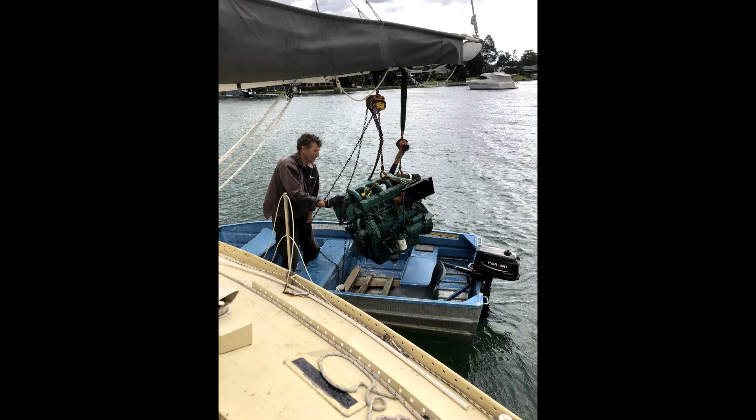Welcome to another video. I didn't get as much achieved this week as I wanted to, but it was still fairly interesting. I got the jackhammer in the bottom of the boat and cleaned a fair bit of it out. It showed me a lot more going on down there in the hull than I realized. I'll explain that with a sketch at the end of the video.

There's a lot of crap in there. I actually think their head might have exploded or something at one point because of the smells coming out of that rubbish in the bottom of the boat. Oh, they were toxic. I swear if it was early morning you'd be throwing up. Just rank.

As I say, it's only a short video. I'm not going to make you sit through 2 or 3 hours of me just sitting there with a jackhammer and a scraper pulling gunk out of the bottom of the boat. The end result was pretty good. I've moved a lot of the rusty material out of the bottom of the boat. There's still a fair bit to go, but I'll get there. Alright, I'll get on with it so you can see what I've discovered.

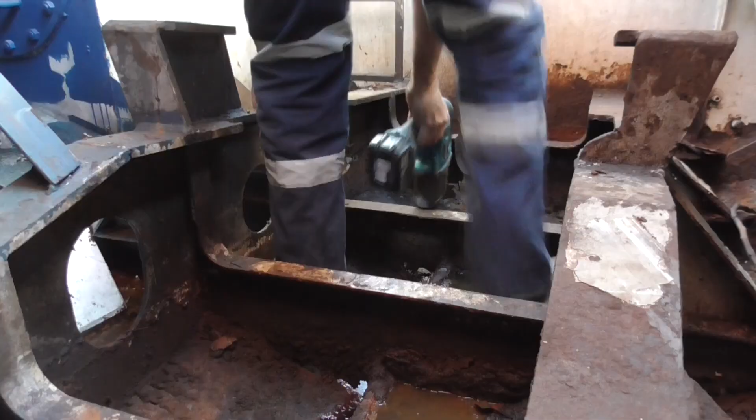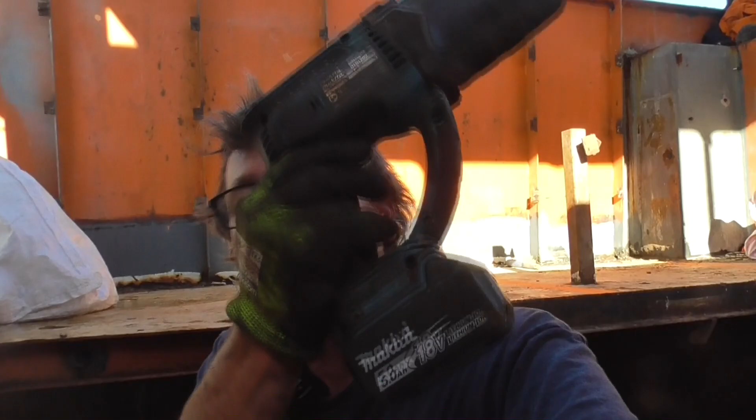Okay, I'll give you a bit of a look at exactly what I found here. I've just been chiselling away with this battery operated chisel. I'm going to get a 240 because I don't feel like recharging batteries all the time. So there we are, there's the first one I've chiselled out.

You can see there, a piece of plate, and then just below that there's another piece of plate. So what I thought last week was exactly what they've done. They've turned around and laminated that plate on the underside, straight underneath this one. There's another big hole just there.

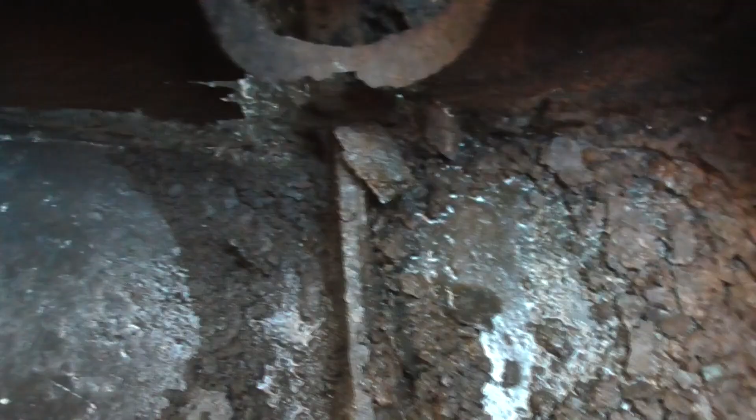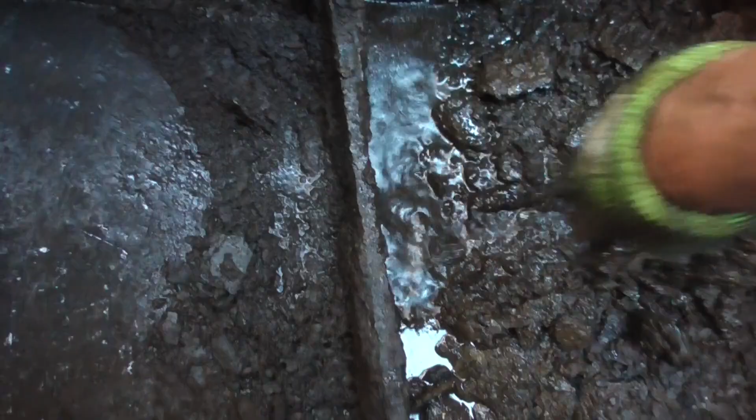You can see there when I was jackhammering, you can see a little bubble. That means there's water caught between the two plates. Look at all that quality steel. What the hell's that? Oh, just rust. I might have to get a little pointed chisel as well, just to run into those corners.

So what I'm going to do here now is pour a bit of water in there. I just want to see exactly what I'm looking at.

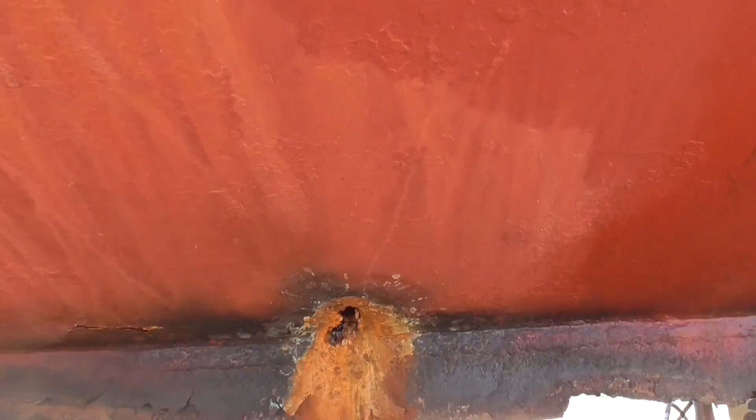It's been 3 days and our water's finally stopped running. Right, we can finally see the extent of this rust. You can see the heavy plate down the bottom there.

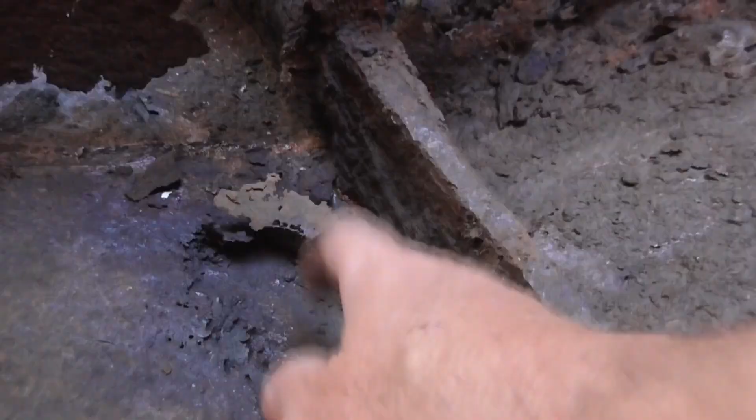And then this is the original hole, and in there is literally nothing left. That is eaten away.

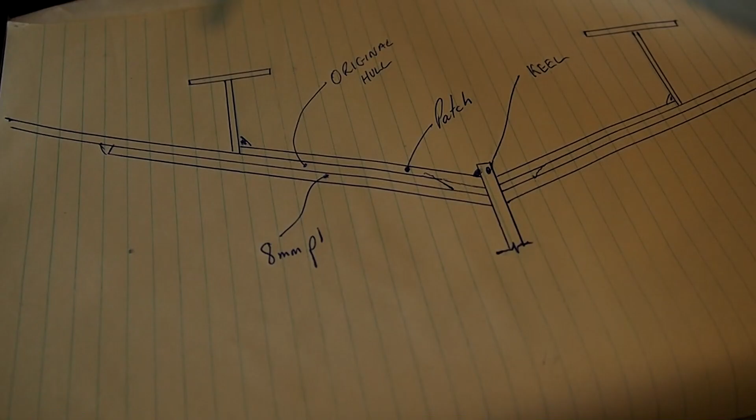Okay, so this is what I found. This piece of plate here is the original hull. Now at some point it got a bit rusty and started to pit holes through there.

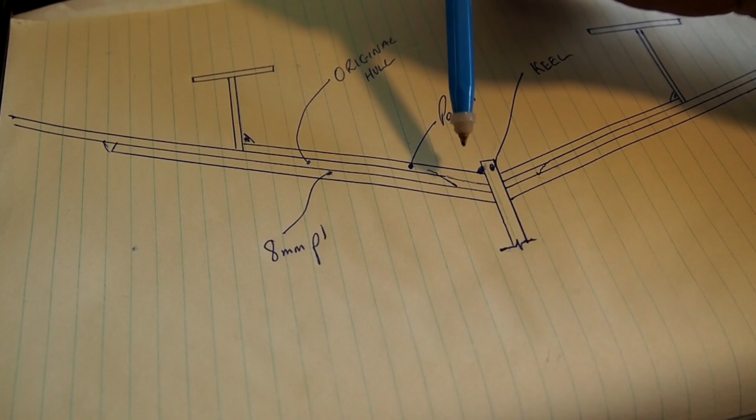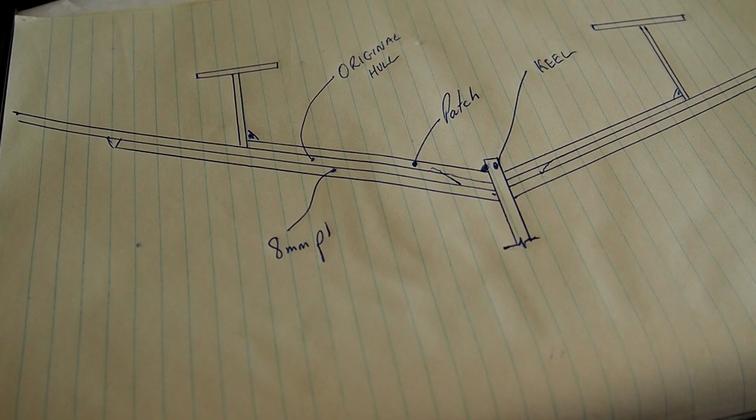Then what they've done is put a patch plate over the top to stop the boat from leaking. They only used a piece of 6mm plate on that, and then it's eaten through again, so they came back later and put this piece of 8mm plate over the outside, welded here and here. So yeah, it's got a lot of steel in there that's got to come out.

So my plan is to cut through here, take this out, cut it off here, and then plate inside with brand new plate from there to there. So you can see there were 3 layers of material. I'm taking out a fair chunk of the hull.

Having this happen isn't a bad thing, because it's going to allow me to redo the entire log shaft. At the moment it's on a very steep angle and I just want to drop it a bit. So I need to install a new tube all the way down to where it exits the boat.

I hope that you got out of the video the same thing that I got out of it - just wanted to know what was going on down the bottom of that boat.

This week I hope to get the plasma over there and start hacking out the plates on the bottom of the hull. I want to take the keel out and try to leave the stringers there if I can. If I can leave the stringers in, I won't have to worry about bracing the boat when I cut the floor out, because they'll add enough strength to stop it from bowing.

I'm pretty excited to get into this next part. We just want to get that bit out of the way, because I feel that's the part that's holding me back from doing the rest of the work on the boat. That's probably the part that's concerning me the most.

So I'm just going to spend the next couple of days working out propeller size for the engine size. 230 horsepower engine, 40 foot waterline, 12 and a half feet beam, and I figured I should need a 26-inch prop.

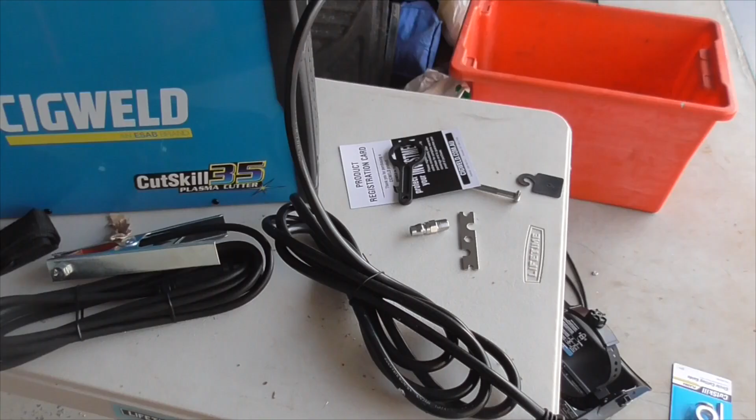Got a new toy today. Yeah, it's a 35 amp plasma cutter. So the brochure says it can do a square cut on 16mm plate, which is pretty bloody good.

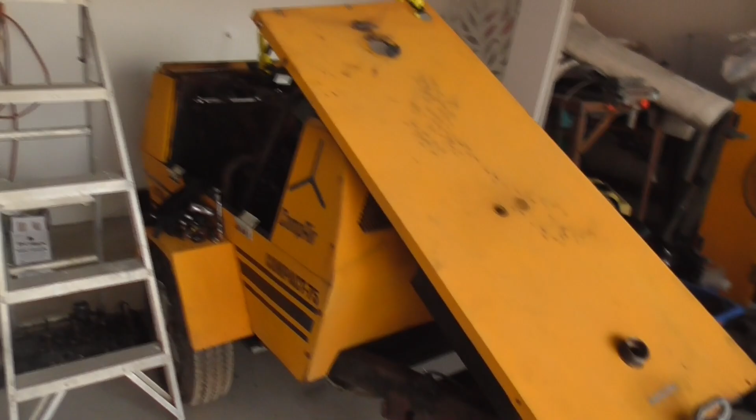I'll be very impressed if it actually does. I really only need it to do a square cut on about 12. So I got a price on gas today, and the reason for buying this was because of the gas cost. The only problem is I need this going. I need to get this air compressor up and running because the plasma runs on air.